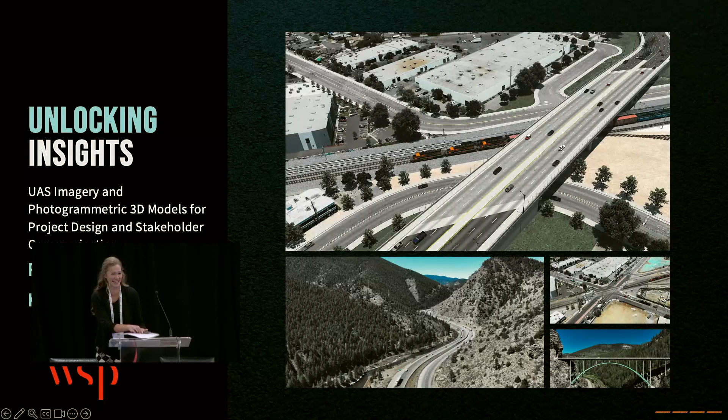Okay, hope everybody's doing good. I see lots of smiles, so let's have some fun. I'd say like everybody in this room is one of the top drone visionaries, so we're all in this together.

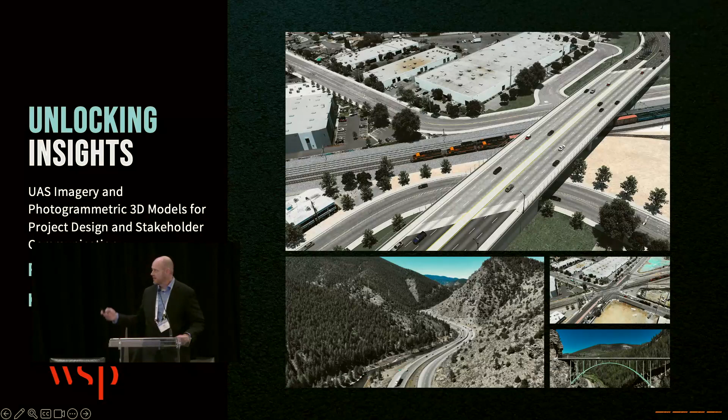So with that, I'm going to talk about this. Originally, Kevin was going to do it, and he couldn't make it, so I'm replacing him. What I really want to talk about here is transforming our data. What do we do with the data? I know we're all collecting all this data with UAS, we're doing all these awesome things with it, using AI, using machine learning. But what else can we do? I'm a big advocate for taking the data and seeing how we can transform it and what the uses are for it. How can everybody in the DOT or other agencies benefit from the data?

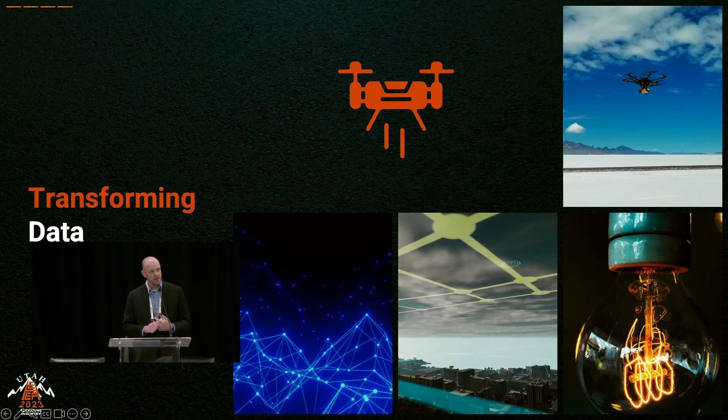So we collect it for survey. We can take it into design. We can use it for incident management. We can use it for historical pieces.

But let's talk about some of the visualization. I've got a passion for that as well with the Viz pieces specifically. I used to run the visualization team at UDOT years ago, back in 2003 - I'm dating myself a little bit. All the tools were brand new, we were trying to use game engines and other items to get it in, and the tools weren't where they're at today.

So with that, it's exciting how that's evolved and changed, and how UAS can play a critical part in that. As we all know, some of these bullet points show what it's good for - large areas, places that are really difficult to get into. And really what I want to get into is some of the details of actually creating these.

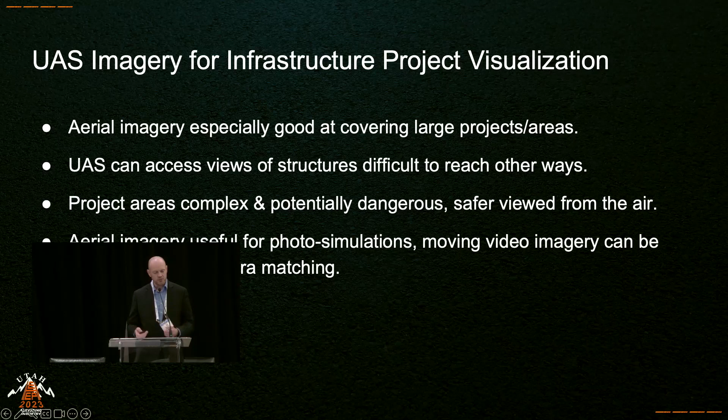And the looks - a picture's worth 1,000 words, I think we always think about that. So I like to have a lot of videos for this.

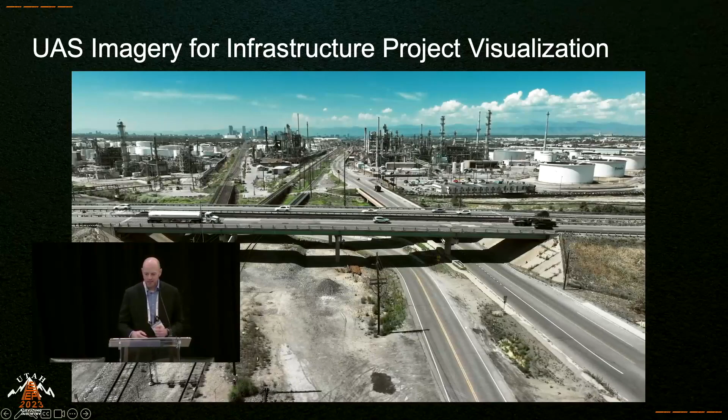When we're looking at these things, if I go back in history a little bit, when I was trying to capture some of these photo matches in the day to do these 3D models, I'd have to go out there and get creative. I didn't have the means for a lot of these projects to get a helicopter. So now that we have UAS, it's so easy to get these views that you're seeing, and I'll show you how we're transforming them.

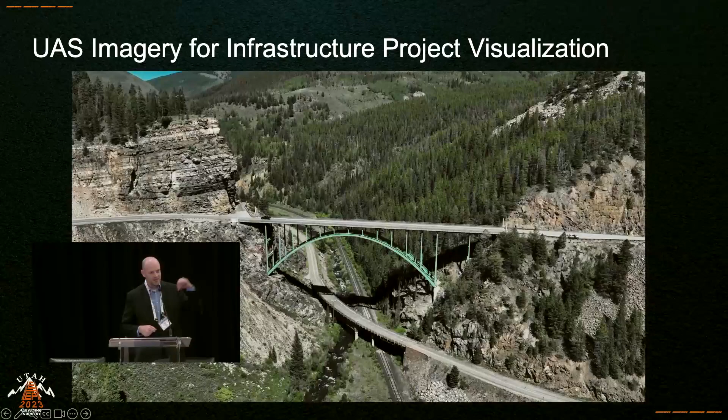But for bridges like these, I'd never get this shot, so I'd have to get creative - I'd hang off the bridges, try to get creative on the edge of slopes, put tripods out there with cameras. The problem in those days was I needed to have a coordinate for where that camera was, and also have tie points tied in on the ground around it. Some of the times it was pretty sketchy as a young kid - just like, yeah, let's go for it, let's see what happens and hopefully I don't kill myself doing this.

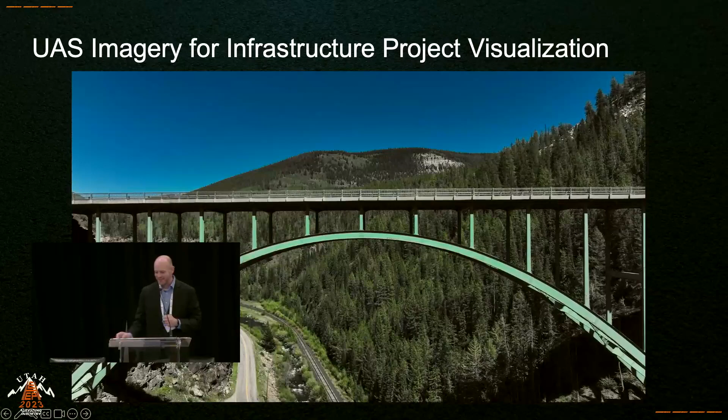With these new tools, as you guys well know, we're able to get this different perspective, get close, and it's cheap. When I'd have to hire a helicopter back then, we're talking $3,000 usually for a project, sometimes more depending on the length. Now we can purchase a drone that can do that for half. So I'm preaching to the choir here.

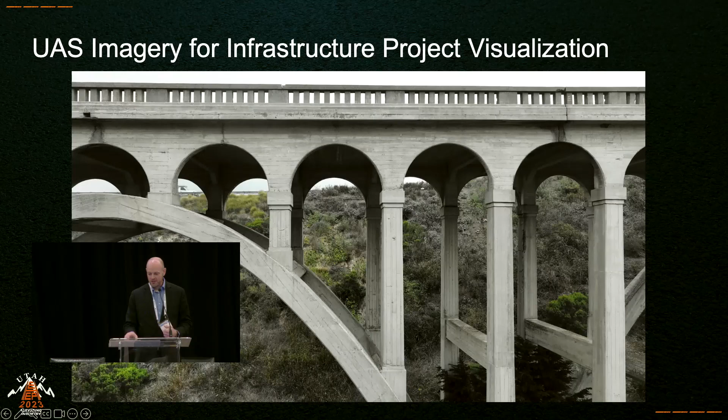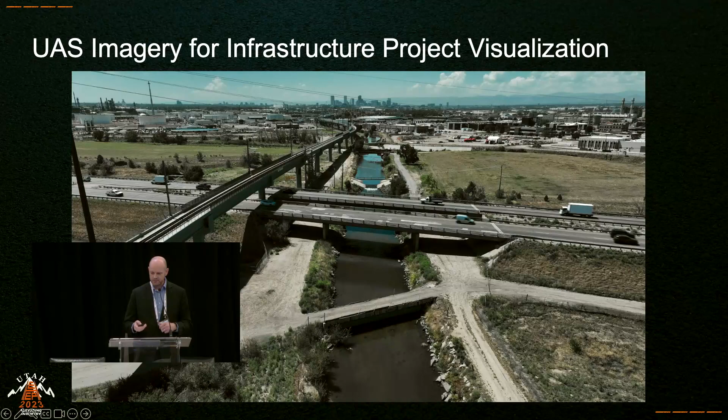Let's talk in some detail about these different pieces. This one right here, I guess it's not going on my video, that's okay - let's just switch to the next one. When we're talking about some of these pieces, you get the view, and it's easy to talk about a project or give somebody 2D plan sheets.

Let me ask this question - has anybody gone to a public hearing or public meeting with your 2D plan set, and you're used to looking at plan sets and just assume everybody else can too? And you get to the public, you're explaining the project to them, and they're nodding, but you can kind of see their eyes are glassed over.

They don't want to act like they don't understand, so they just say, oh yeah, I get it. But then you get done with it, and they're like, oh, hell no, this project's not going to happen because it's horrible. Even though they sat with you and nodded their head and said everything's great. I went through that many times, but then when you do a visualization like this, it clicks.

Instead of being glassy-eyed, they're like, oh, I understand it. And then you can have critical feedback from them. They say, oh wait a minute, I get this, but here's what I like about it, or here's what I may not like about it. So you can have a more constructive conversation regarding the data itself.

That's kind of how these corridors go. If I was on the ground trying to do a photo match, I'd do multiple angles and try to explain it and do the best I could. But as you can see, those aerial views are... let me see if I can go back here again, see if it's gonna work on the video. When you get this aerial view, suddenly you see it from this new perspective.

Then you can stretch it around, get animation in there, and really show what it looks like. It was really interesting for me when you take this to somebody and show them their whole city, and they're like, okay, this is what the project's gonna look like, but how does it impact me? What does it look like from my house? And you can take them to their house and show them exactly what it's gonna look like.

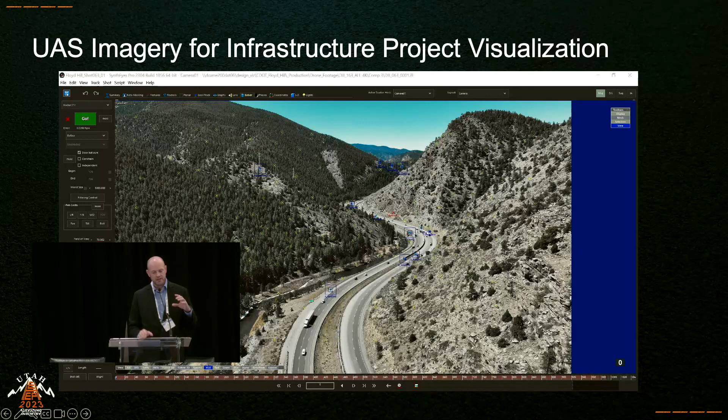Instead of just having a nice video picture, you're taking it in there, and then you can match your design exactly. That was the hardest thing for me in the past with some of those cameras and other things, because when I'd take it with a normal camera and put a different lens, I'd have to know the focal length, I'd need to know where the target location was, and everything else. But this new software makes it relatively easy to do some of this.

So you can see each of those points to match it, and suddenly we can overlay the design and then see what it is. The other really cool thing about this is not just using it as a public engagement tool, but actually for design. When we're building these in 3D and we've got the data of the actual ground around it, we're finding problems that would have come up in construction, caught early on, so we can fix it then and not have to worry about it with the change order later on.

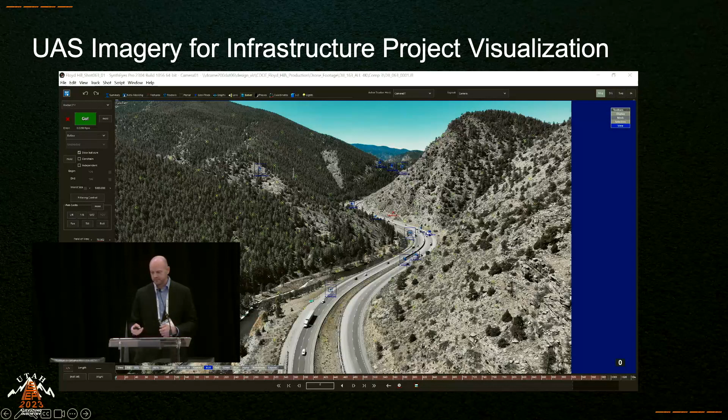So it's quite powerful that way. This shows these identified points like I talked about. You've seen them on the ground match, so each one's an XYZ coordinate. You match it in there, then you can match that design data. That's the workflow for how that works.

So something to think about: make sure that you're using the same coordinate systems that you have in your CAD, along with what you're collecting on the ground in your survey. I've seen many times a surveyor will collect it in one coordinate system, and then you try to take it into design and it's another one. Or the bigger problem, they collected it in US survey feet, and somebody set up the CAD file in international survey feet. So something to think about in your workflow as you're trying to get these to match.

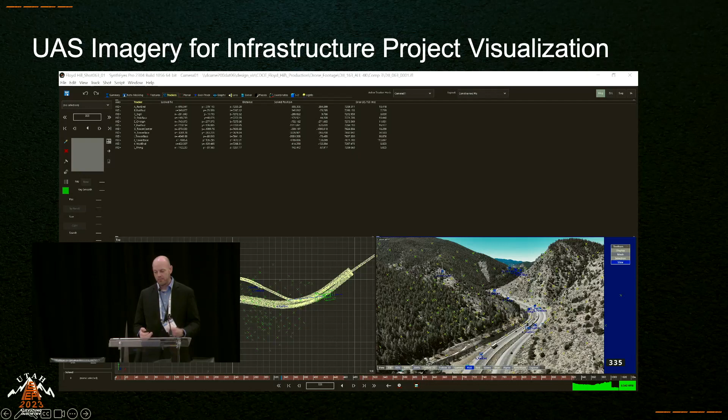That's how it can go, but it's a powerful tool, and I'll show you some cool examples. Here's another one, a promotional video for California high-speed rail coming into San Francisco. You get your UAS, fly those camera paths, put a 3D model into it, and then take it into different software packages. This one was 3D Studio Max, and it's kind of cool what you can do.

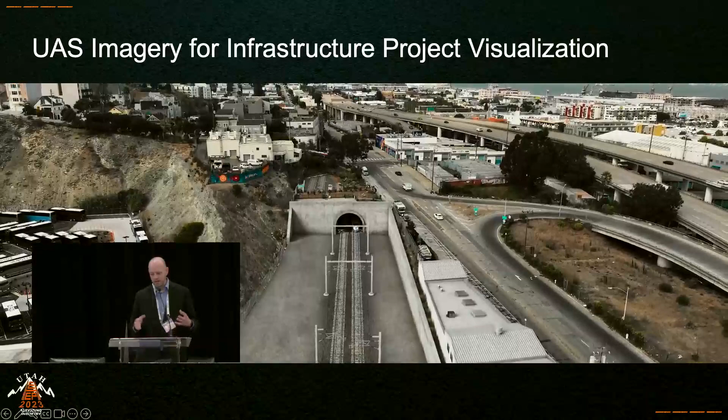I'll play this one again because I know they go fast, but the train is all 3D. We animated the train in 3D, the tracks, and it's the real city that's behind it, right in the environment of what you're seeing.

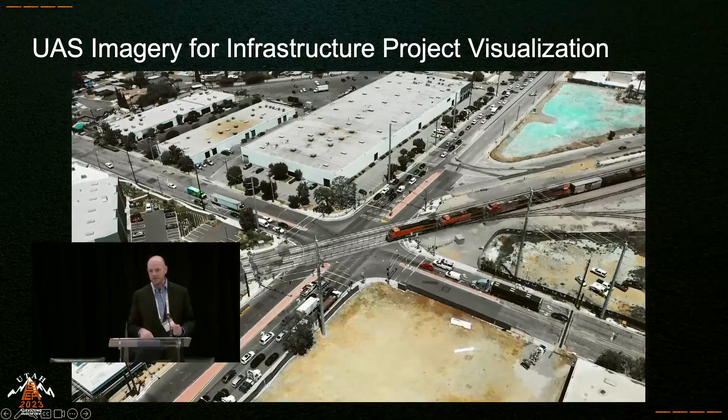With some of the new tools as well, it's amazing what you can do. If you've got some of your VR goggles, I know JD's played around with some of those, and your HoloLens, quite a few states are doing those.

The other piece you can do with this is take those 3D models that you collect with your UAS, make it an awesome 3D model, bring it into your office, and put those on. And then suddenly, I'm not standing out on the highway with 80-mile-an-hour traffic going next to me, or in Utah, the speed limit's 80, but people are going 90 or 100.

And what are they doing? This is my cell phone, and they're looking at their cell phone as they're coming by. So you have that safeness, and you still can see the data that you need because you have a 3D model. And not only that, you could bring it in anywhere.

Like Ryan was showing yesterday, think about the remote immersiveness of that. You put on some goggles, you've got your drone far away, or your UAS, and then suddenly you can immerse yourself in the environment and be there with these VR goggles. The technology's not all the way polished, it's getting better. Sometimes people get motion sick with it, but it's cool what you can do.

Even with the DJI goggles, we got it for our bridge inspectors, and they loved it. But you had to have the right person on the sticks, or else, or maybe not if you didn't like the person that was watching. So you can make them sick really quick. But that's another tool for it.

So these are just some more examples. This last one is kind of an oblique mission, so instead of flying nadir or straight down, we fly oblique on some of these. This one was 5 separate gridded passes to capture the photo, and we had the overlap like you normally would. Then ultimately you take that 3D model - this one was done in Context Capture and also Site Scan and Pix4D.

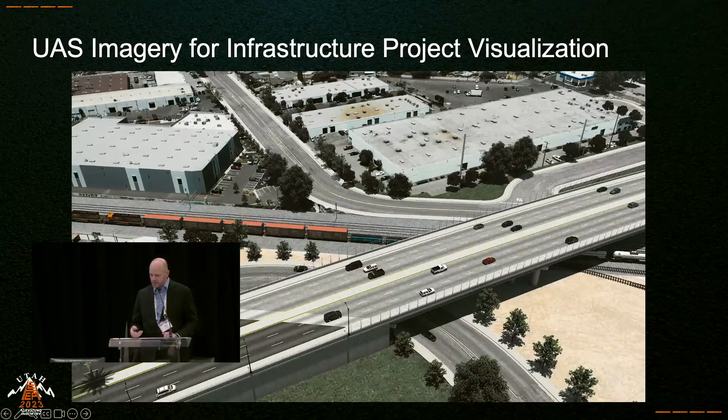So these are just some different examples. There's different ways to do it, different drones, different cameras, but you don't always have to spend a lot of money to get this going. Even with the Viz stuff, the tools are getting better, cheaper, easier to use. 3ds Max, when I'd train somebody back in 2004, 2005, it took 6 months to get them up and running. Today it's getting better—you can take things from Civil 3D right into 3ds Max, and then into other tools. Gaming engines are another example, taking people into the whole environment, not just one project, but the whole city. When you can do that, you can take them to their doorstep and see what it looks like from here.

If you've got your legislature in the room and they want to see what it looks like from their perspective, they can fly around and see it, it's all there. The citywide data we have available today is fantastic, and we can supplement that with UAS, flying for a higher resolution ground sampling distance. Then with other tools, take your LiDAR and other things and go inside the building. If you're into advanced air mobility, think of the vertiports—you can create that whole experience: flying in, coming down, going into the vertiport. You can not only see that beautiful picture, but also understand the pathing around that.

Or even looking at your infrastructure for the DOT—where can I place these things? Where can I put them? Where does it make the most sense? So a lot of this new technology that's coming, UAS I think is going to be a key component for collecting that data.

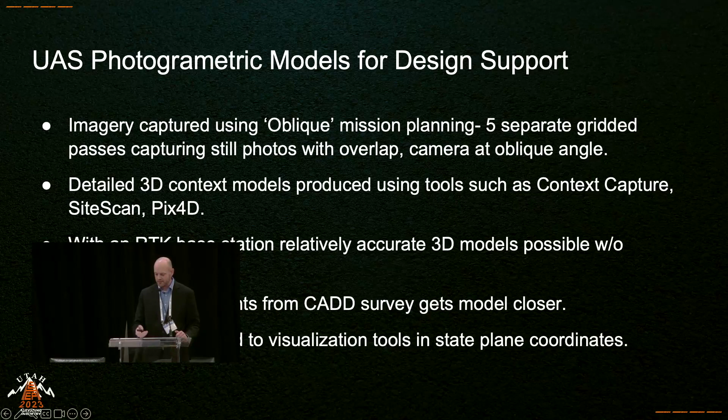So here's another video showing the steps in creating a 3D model. This one's a series of images taken of a bridge, processed through Context Capture. I know I'm mentioning a lot of different tools—there's so many out there. I've mentioned Autodesk, I've mentioned Bentley, I know they're both in the room, but there's some free ones out there too.

I don't know if my video's playing or not on this, but that's okay. Now it's gone.

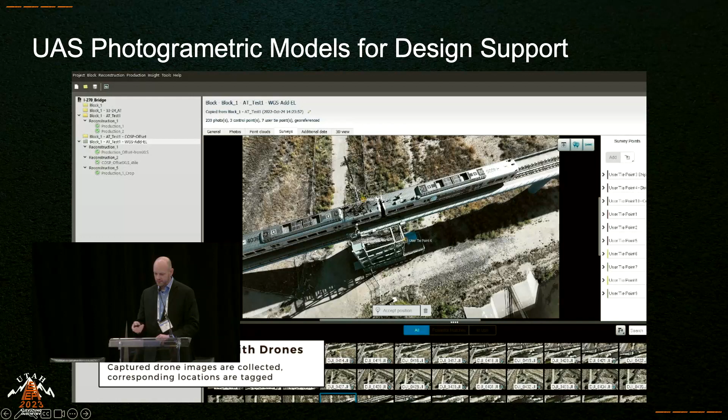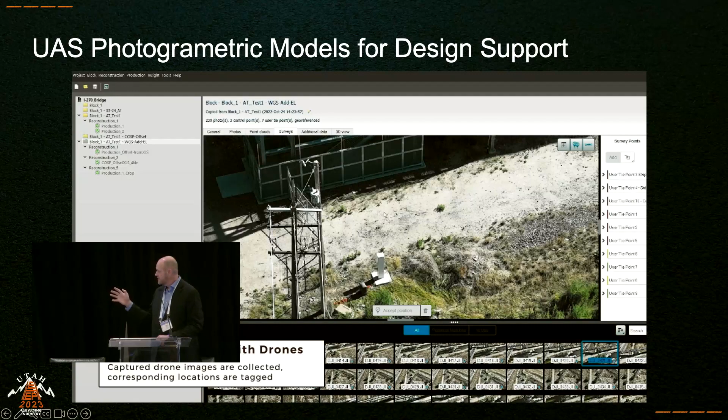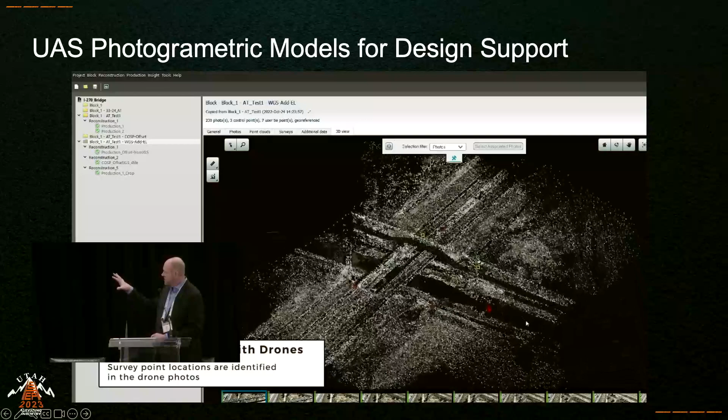So let's play—you can kind of see, you get your images, you'll tag it, you've got coordinates again like I described. You'll put it all together and create this full 3D model that you can take into and create a full visualization. So you're seeing the point cloud here, and then you can go in and actually put in the design data and overlay it as well.

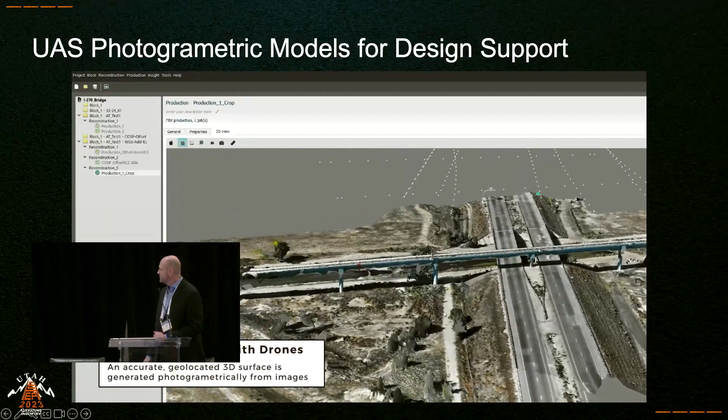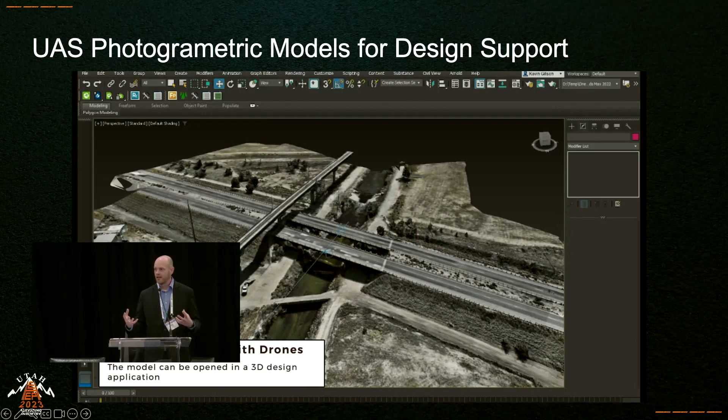I know most of you have done this, so I don't want to bore people used to creating point clouds from here. But the point is, and I've made this before, we've got data that we've never had before. Really figure out what you can do with that, find these new uses that are out there. Sometimes we really need to think outside the box, and by getting together and collaborating like we are here, I think that's how we can do that—see what people are doing, how it works, and what doesn't.

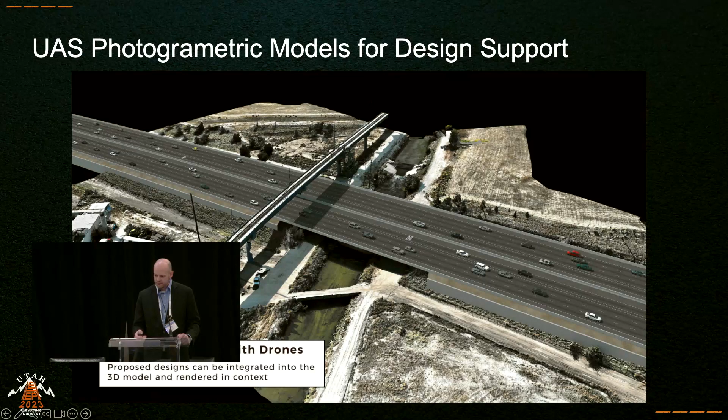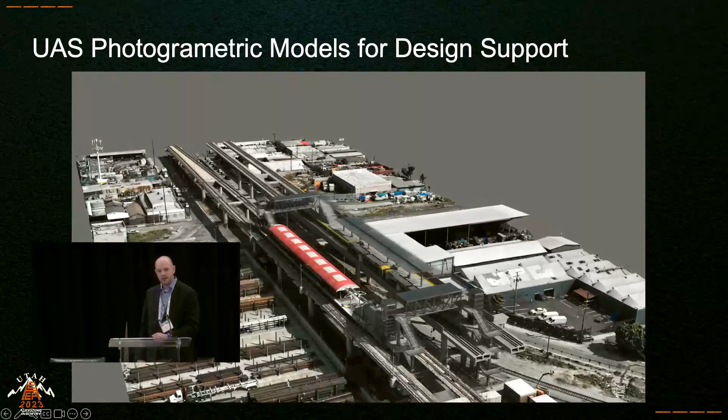Here's another example: an LRT station. You can insert it into a 3D photogrammetric context model. The graphics are getting so good today—the one with the silver roof is the 3D model in here. Sometimes you can't tell, with all the ray tracing and other technologies going into the rendering and the processing power we have. It's photorealistic, and it's hard to tell the difference on some of these.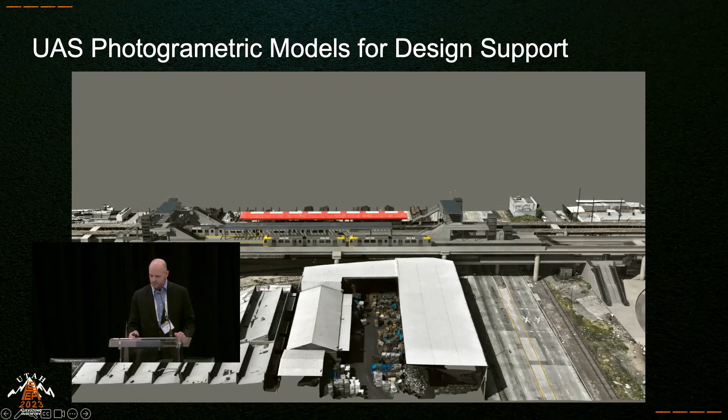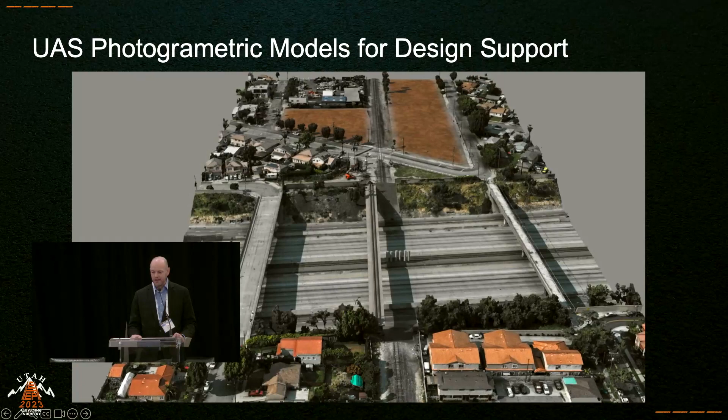Just some other examples I want to show you—here you can see what's been put in there, what's been transplanted. I think I heard somebody asking, can you do phasing for construction? And absolutely, that goes into play too, not just in the design—what works, does my design actually fit and work—but the phasing itself, does it actually work? Does the pathing work? What problems are we going to have? How can we set up our traffic control? You can do this all in 3D with that UAS data as a background, to see the environment as it is, not how you perceived it to be from your design before.

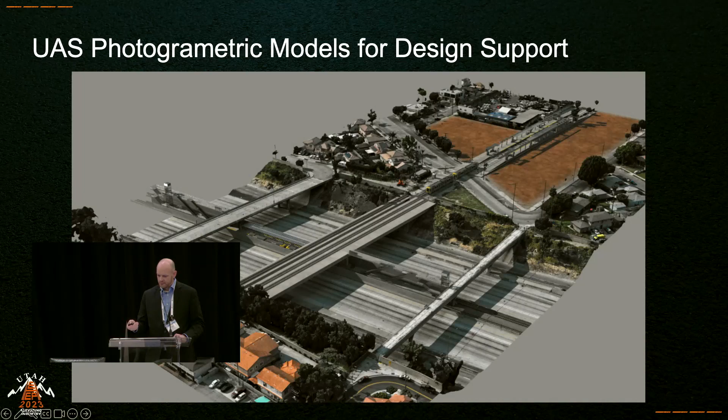Here's just another rail yard, this one's in downtown Denver. And what this one's being used for is redevelopment planning.

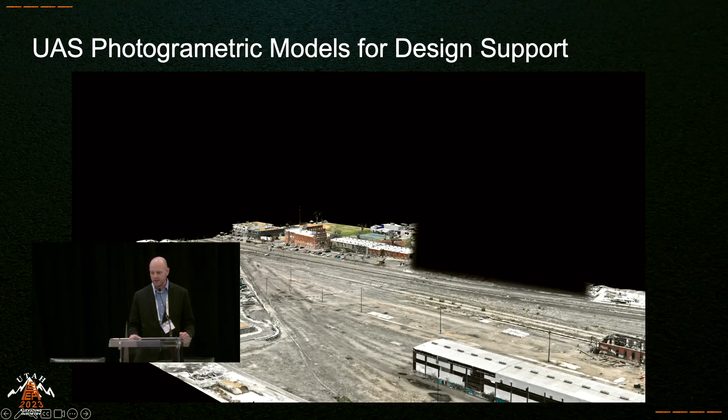Everybody here uses Google Earth, but as I mentioned, some of these city scale models you can get—we've got full cities like LA, San Francisco, a whole handful of them. Some are lower resolution, some higher. We've got some that are 3 centimeter data of the entire city, and it's fantastic. You can also take your UAS and fly it to get 1 inch or less resolution, and use your LiDAR data as well, combining all that into these 3D models.

And for those that haven't flown these automated missions, I've had people ask me, do I have to actually click the camera on each one of those? No, you don't—it's all automated today. It's easy. You put in your flight lines, you put in your overlap, you tell it what angle you want your camera to be, and let it go.

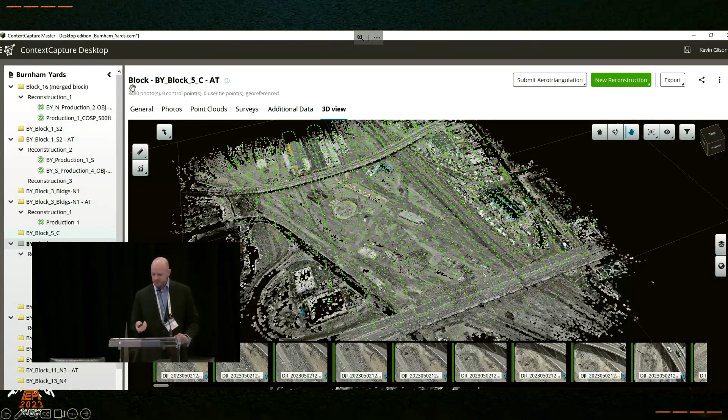What's the cost? That's a good question. Depends on the scale, right, and the design involved. If you've already got the design created and just want to put it into this, it's very low cost. If you're looking to do a city scale model, the ones we already have completed aren't too bad on price. If we still need to fly it, then we can—again, the city scale models we still do with helicopters at times, working with a company to do that, but it depends on what you need. If it's a smaller area, obviously UAS. What I'm a proponent of is sometimes you already have the tools to do this. If you've already got UAS, the city scales may not work, but some of the smaller areas certainly do. Any other questions?

Yeah. For noise? Yeah, absolutely. I can't name the client, but we did some noise studies for UAS for communities in Australia, to see how that is. What we found on the noise side is you can visualize it and see where it's going to go, but it's not just the decibel level, it's also the perception of that noise, how it sounds.

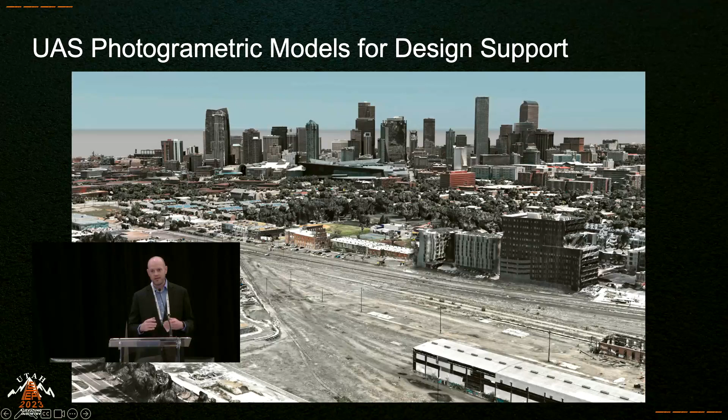So we've done things with that too, to say what level are you okay with. And what we found also, going into a sidebar on UAS package delivery—if you don't engage the community, things don't work out so well. They get annoyed by it, they don't understand the benefits it brings for them. So if you take that first and say we're going to have this new tool coming, here are the benefits it can have for you or others in your community, it goes a little better than if suddenly they're just seeing drones over their head and don't understand what it's about.

It's kind of like with sirens, right? If you hear a siren, you get out of the way. If you know one of those UAS is possibly saving somebody's life, it's a little easier to accept—that could be one of your family members, or maybe it's you one day, with one of the defibrillators or something else on board. But I don't want to go too off topic, happy to have a conversation again.